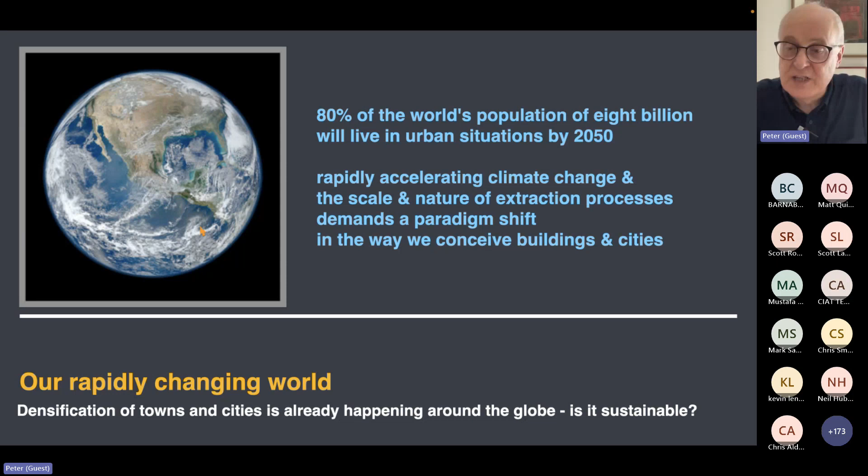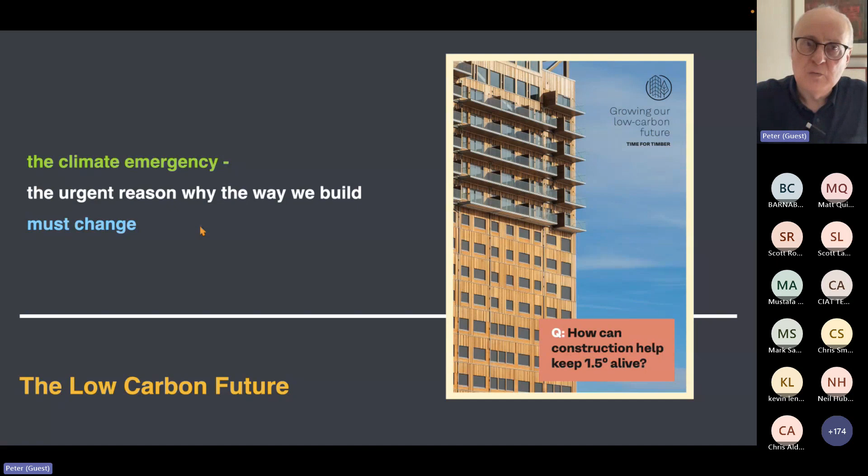So that previous slide was really to say the world is changing. Most of the population is shifting to cities, but climate change, we're seeing all this in the last few weeks, the incredible changes going on. We need to look at how we can respond to that sustainably and sensibly as professionals in the construction sector. And this whole question of the 1.5 degree issue is fundamental to construction, because so much of the world's greenhouse gases are generated by the construction industry internationally, and we really need to think about how we need to change and what that change requires.

So when we say change, I've listed 2 columns there: the energy crisis, climate emergency, Brexit, post-COVID, cost of living crisis. We all know those things. We hear about them. What we do about them is another issue. On the right-hand side, you'll see things that are very particular to the construction industry in this country. We have problems with damp in buildings, condensation, poor or no thermal insulation, poor air tightness. We also have poor construction quality, and that's been exacerbated by the loss of skills, either people retiring from the industry brought on by COVID, or people leaving the industry brought on by Brexit.

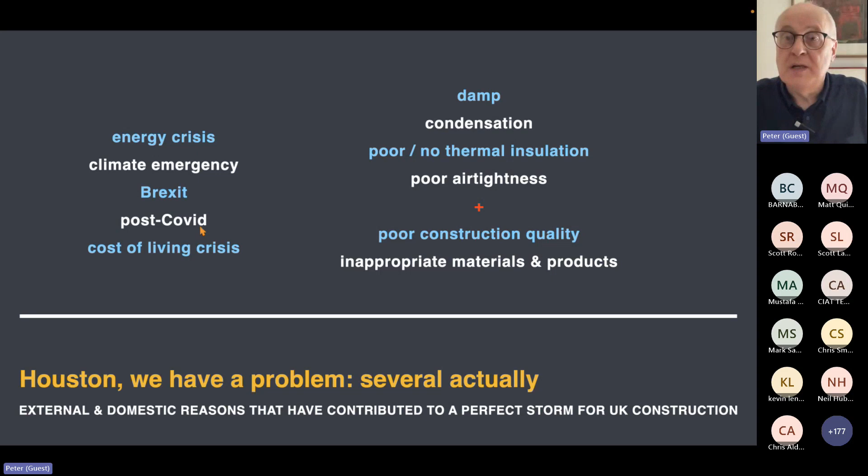But we also have a lot of inappropriate materials and products being used. We import, for example, more than 80% of our construction timber into the UK. This is not sensible in the modern world.

And when we look at Mark Farmer's, something's happening. Oh, my buttons are going too fast here.

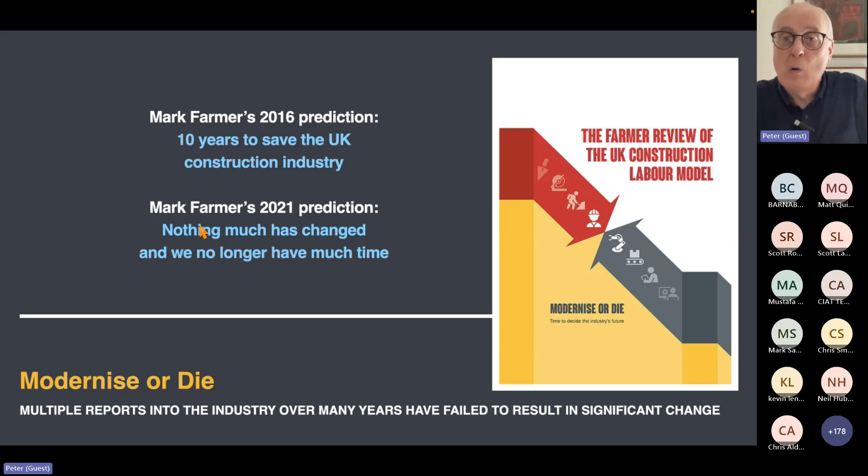Look at Mark Farmer's prediction. He wrote a very, very good report, a seminal report in 2016, saying there were 10 years to save the UK construction industry. 5 years later, he wrote another shorter report saying nothing much has changed. And that's partly because our industry doesn't change unless it's forced to by regulatory means or legislation. And we need to really get serious about this. So I'm not trying to be a harbinger of doom here, really to say there are huge opportunities and possibilities in what I'm going to talk about.

And partly that's to do with what I showed with that global picture. The urban densification process is rapidly increasing movement of populations, not just from country to city, but from country to country, and there's lots of debate about it in this country. The climate emergency, we know about net zero carbon targets. We're nowhere close to meeting the circular economy. There's some energy towards developing that, but it is not yet at the level it needs to be. The use of renewable materials is still at an early stage for a lot of practitioners, and even thinking about the use of homegrown timber resource.

And I'll come on to that, because we have an issue here in this country, which is we don't actually manufacture anything. Most of the things we produce as mass timber systems, CLT, etc., we import. It was possible to manufacture, and I'll come on to that later, but we need to think much more about the resources we have here, and particularly the renewable resources we have here.

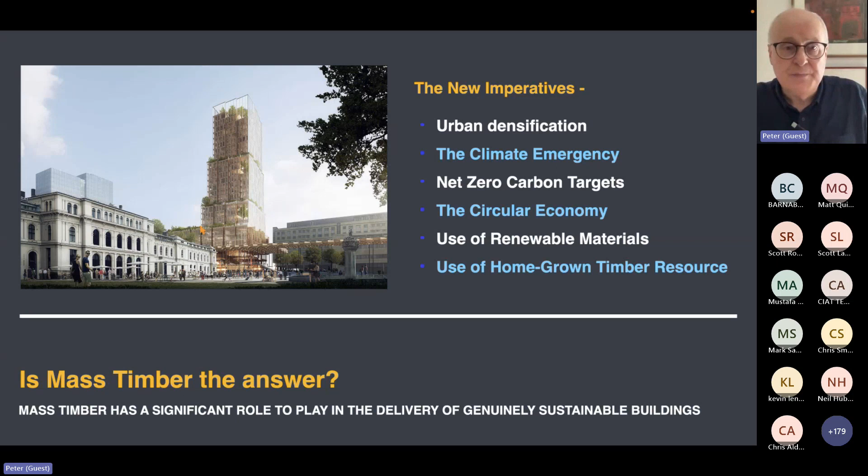So is mass timber the answer? Well, it's up to you, really. We can either all be in the vanguard of change, or we can lag in the slipstream. We can look at all the research, the projects going on elsewhere in the world, and still feel, as many contractors I speak to do, they say, "Ooh, this is a new product. This is something different. This is risky. We need to put a premium on the price here."

So this is the building, I would say, was the first CLT building. So we've actually been using CLT in the UK for nearly a quarter of a century. This, the roof and the walls here of the Shrewsbury Music School; Pringle Richards Sharratt, or PRS as they're now known, did this building. And it was a very early thing. They discovered something about CLT. They went to a company in Germany, Dickholz, and brought CLT panels here and introduced them into this building.

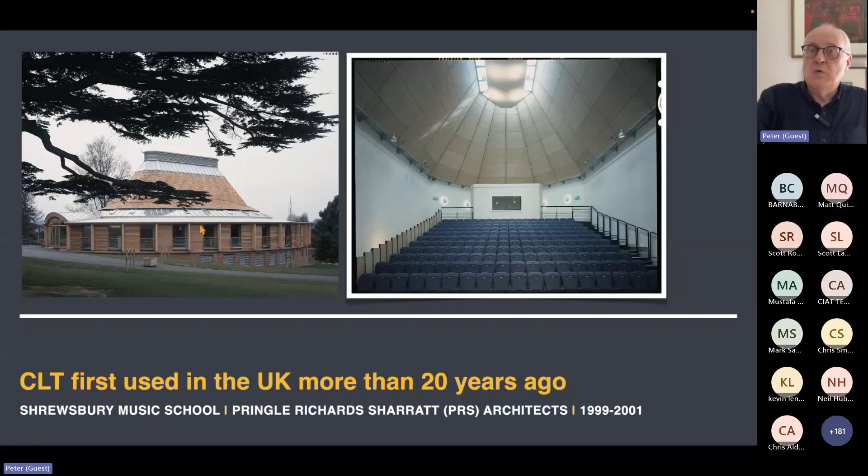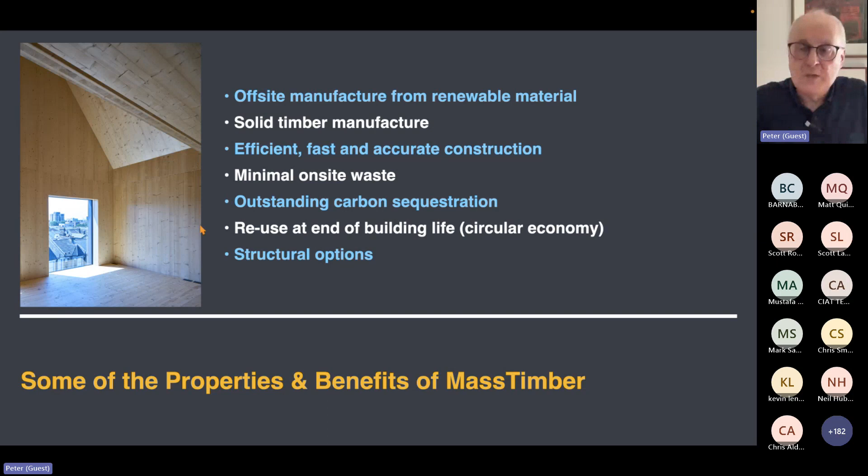So there are many properties and benefits in the use of, and I'm saying mass timber as a collective term here because I'll come on to what the different mass timber systems are. But you can see here there are lots of benefits that come from the use of CLT or glulam and so on. And actually, I probably have a list of about 50. I think there's about 20 here, or maybe less than that, but I'm limited in the number of slides I can show you today in terms of time.

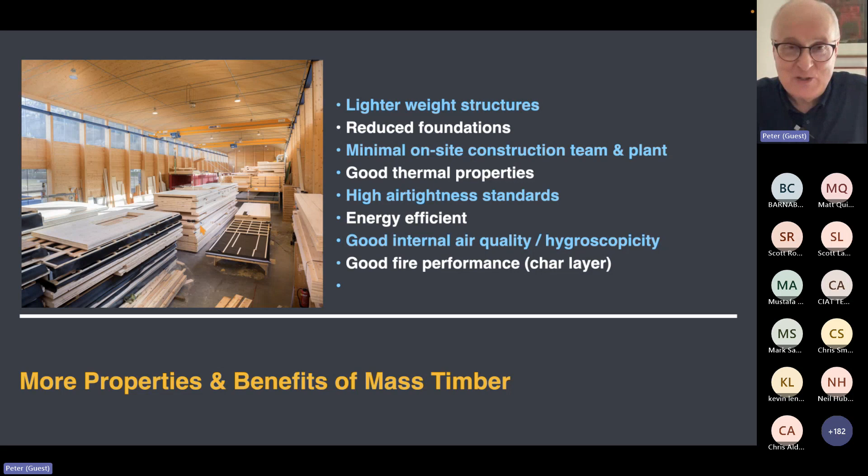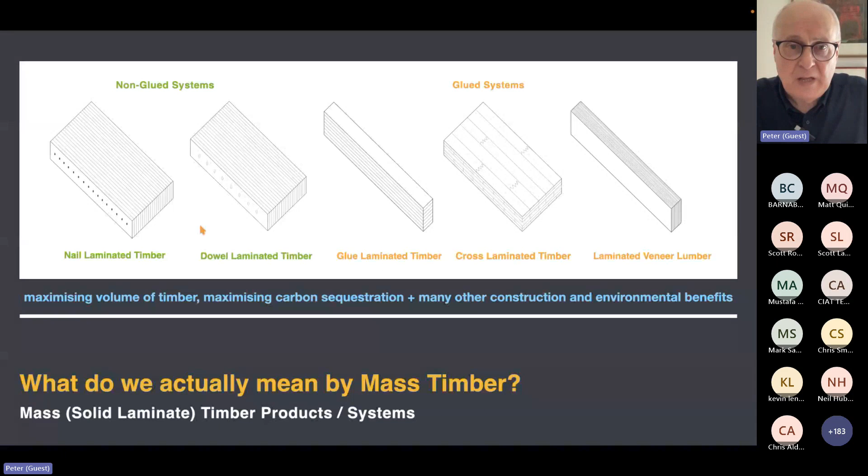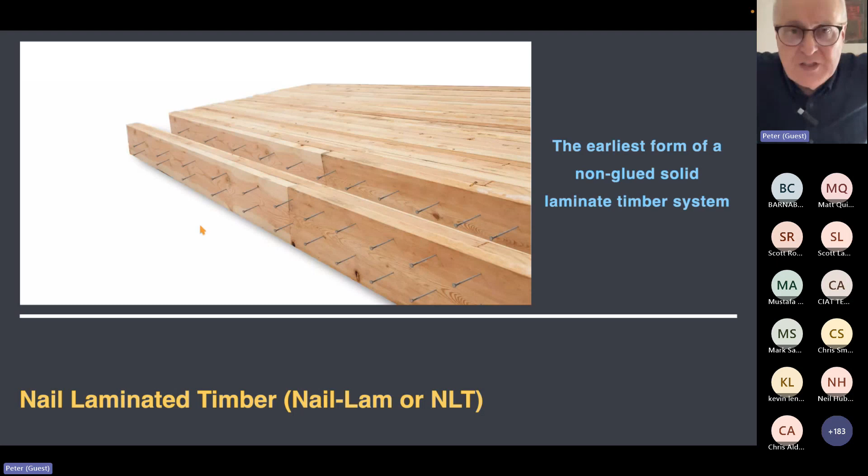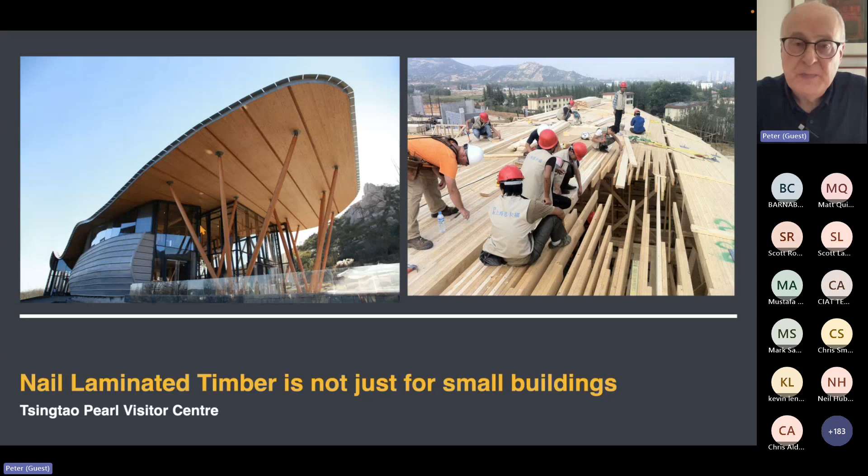Nail laminated timber, you can see from this illustration, it does what it says on the tin. It started in North America in the 19th century, nailing big planks of wood together to create flooring systems in warehouses. We have a whole presentation about just nail lamination, so it's not just a pass-you-by kind of thing. This is an example of one in China, where the main panels are developed by a company in Vancouver, StructureCraft. And you can see on the roof the way the panels are being connected to each other manually, but the main panels are prefabricated. And so it's not just a rectilinear opportunity of simple box sections of nailed panels. We can do all kinds of things, and that's increasingly the case.

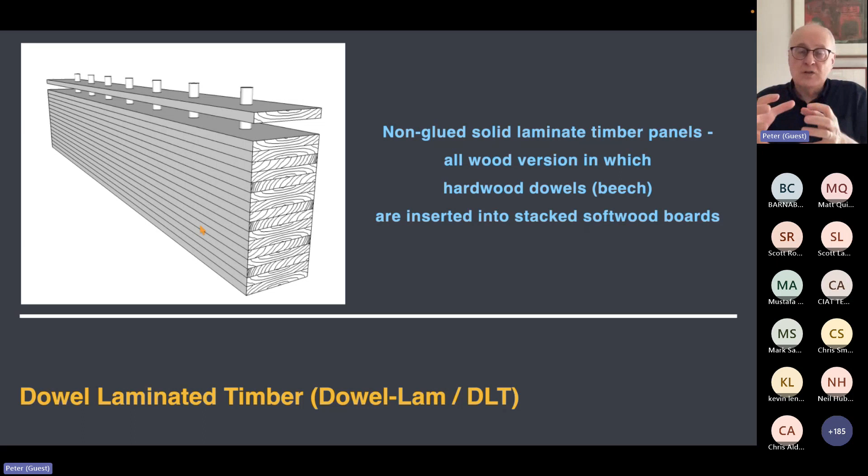Dowel lamination. Yes, it's non-glued solid timber, laminated timber panels. You can see here, just like nail lamination, a pile of boards, this time with holes drilled through, so you're not nailing from board to board to board. You're drilling holes all the way through a stack and then inserting hardwood dowels into softwood boards. And with the difference in moisture content between the hardwood and the softwood, as it reaches equilibrium moisture content, the hardwood dowels expand and lock the whole thing together. And that's basically the technology.

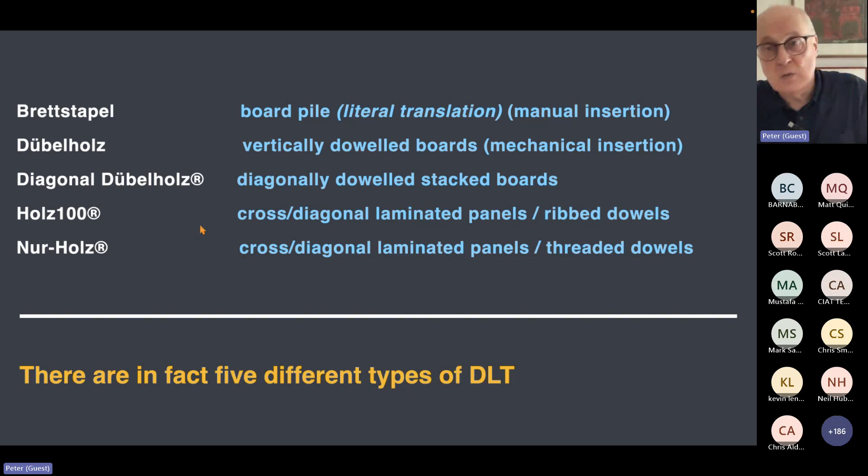But there are actually 5 different types of dowel lamination, and we do, again, a whole course on this about all the different types and the different opportunities and the reasons why this is an interesting technology. And partly it's an interesting technology because this is something we could manufacture locally throughout the UK. We don't need a huge facility with humidity and temperature control for the curing of glues. We can do things more local to the forest and so on. So this is an interesting thing and worth coming back to.

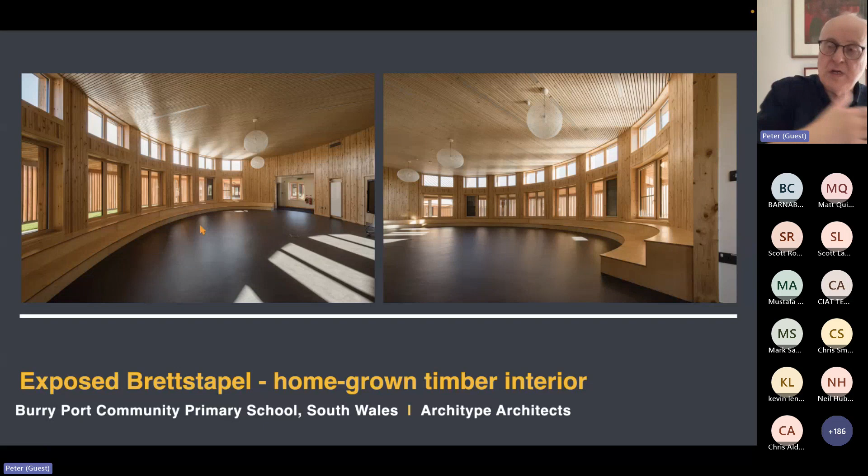And using our locally grown timber, whether the species that are available in the south of England or in Scotland or in Wales, different opportunities are possible.

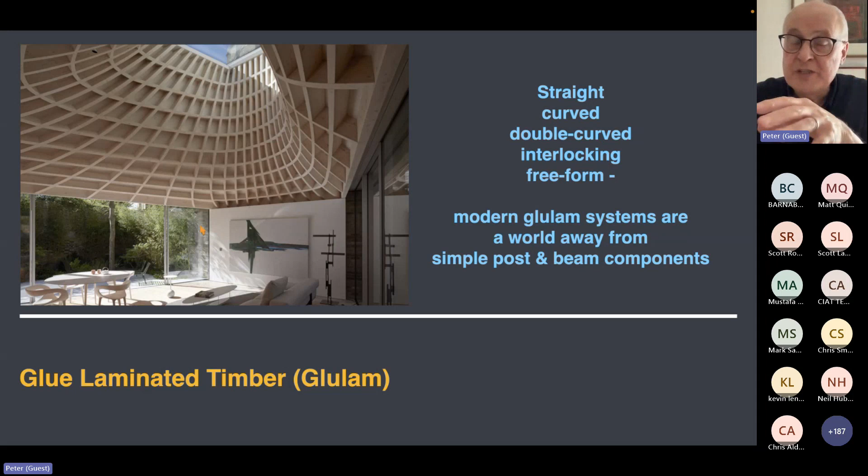It's a very remarkable building because every piece of glulam there is individually tailored to fit. There's no identical pieces there, and every piece was brought through the house to build this in the back. So all things are possible, through the kind of computer technology we have to design things, but also the computer technology we have to manufacture things.

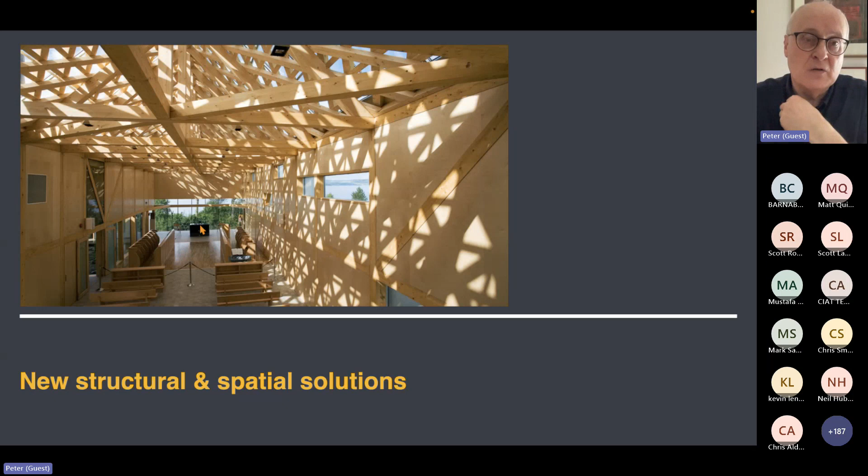And we can get new structural spatial solutions with glulam. This is using very basic beams, but overlapping, crossing, everything else to get a remarkable quality of interior in this convent in Norway.

Then if we move on to cross-laminated timber, I've said here, it's very definitely not a fashion item. It's treated in the magazines kind of like that. Oh, well, we're all using this now. It's all the latest thing. And it's partly the latest thing because it locks up massive amounts of atmospheric carbon dioxide over a long period of building and possibly beyond if we reuse the materials. It's a very sustainable way of building. It's a very quick way.

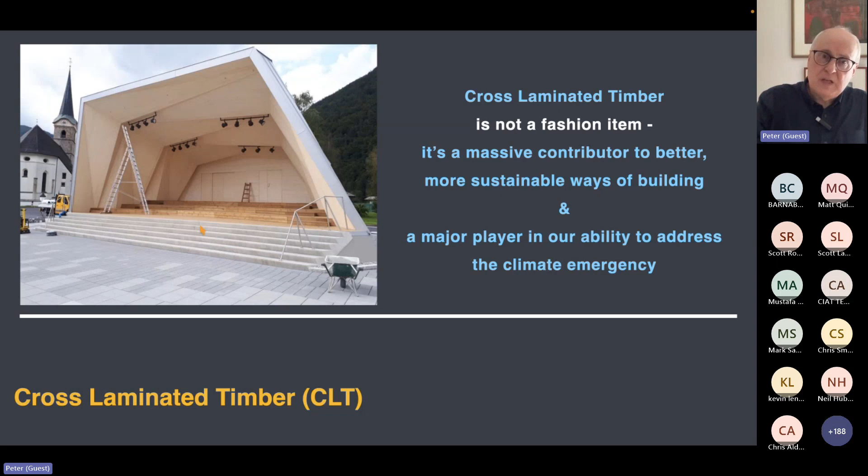In that list I showed earlier, it's lightweight buildings. So less foundations, in this particular example in London, beside a canal, less foundations. And in London, you're over Victorian sewers, underground train lines. We need to think differently about just pouring lots of concrete into the ground. It's not the way forward. It's still necessary in many instances, and I'll talk about hybrid structures possibly if there's time.

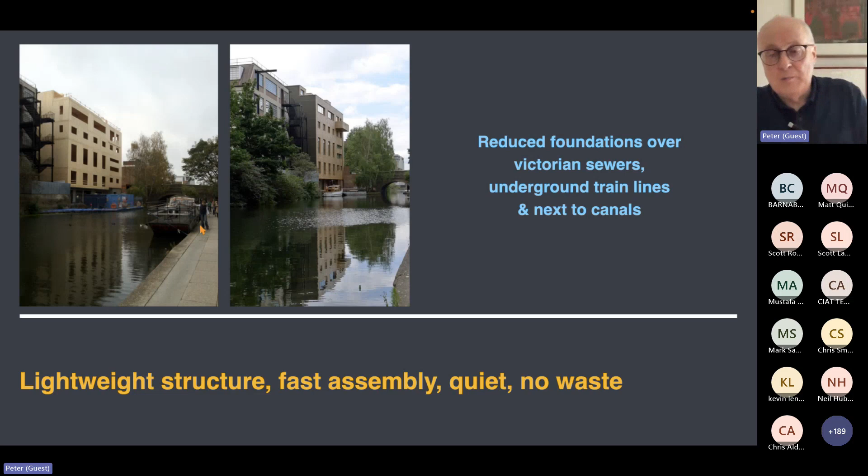The point here is that prefabrication of panels and beams and so on means fast assembly, very precise connections, maybe within 1 and 2 millimeters, and quiet on site. That's a big thing in urban situations, being able to build quietly with few tools and no waste, because all the waste is produced in the factory and it's reused there for firing kilns and so on to dry timber.

So hardwood CLT is something we have made in the UK, and this project here in the courtyard of the V&A in London was designed by Waugh Thistleton Architects and ARUP. It's hardwood. It's a tulip wood from East Coast USA. It grows like a weed there, but it's generally used there just for furniture or plywood manufacturing. But it's a beautiful material, and its great benefit is it's incredibly strong and stiff and lightweight.

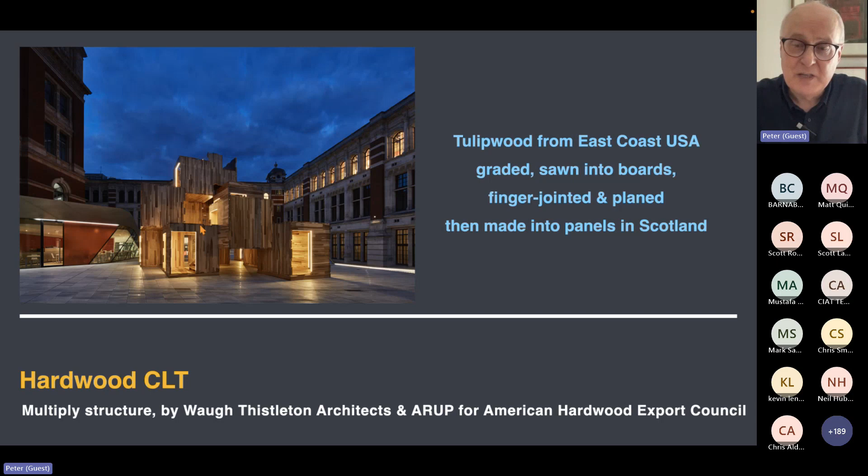Well, the panels themselves were made in Glasgow, but the boxes were made in York and then shipped down to London to be assembled here without foundations, because that courtyard floor is over a gallery. And it was a kind of three-dimensional maze, but it was about showing we could make modular buildings, but also showing we could actually make CLT in the UK, albeit this is imported timber.

Then on the fifth of the systems I'm talking about here, laminated veneer lumber. This building is in Seville in the south of Spain. It covers several city blocks. It's an enormous building of interlocking laminated veneer lumber. And if you don't know what laminated veneer lumber is, I should have explained this when I showed that diagram of 5 systems, because LVL is what it says.

It's a veneer. So what happens is that logs, instead of being cut up in a sawmill into boards, the logs themselves are rolled against the blade. So there's a continuous rolling, creating a continuous sheet. So the log is reduced down to about the size of a broomstick diameter. And that continuous sheet is cut into different sizes. They're overlaid, glued to build up very large panels, or just simply standard size boards, similar to the size of a plywood board.

But when you get into much bigger LVLs where you can cut and shape and twist and so on, you begin to see the possibilities for different kinds of building forms, perhaps building forms that relate more to building types, new building types, and the large, ever larger building types that we're seeing, and needing to find ways of building them that are not being built with concrete or steel for large spans.

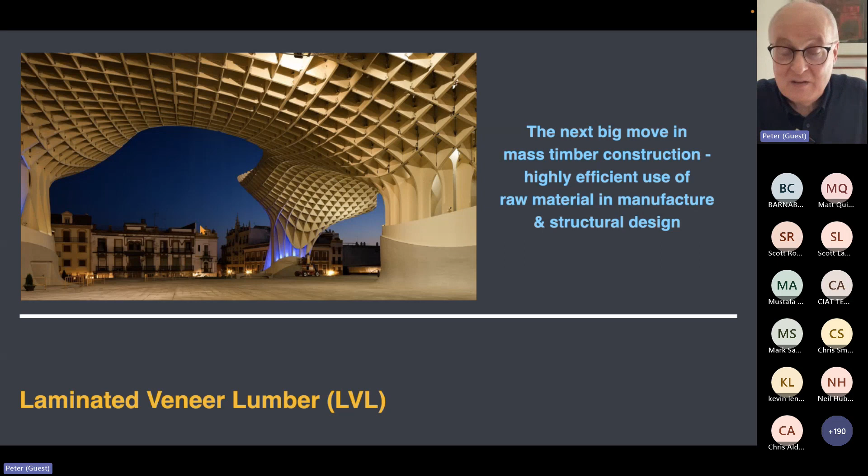In other parts of the world, a lot of research is going into bamboo and producing some extraordinary buildings and materials or products from that. I'm not going to talk about bamboo here because, well, basically it's grass, not wood. And I've nothing against bamboo. I think some of the things that are going on in the world at the moment are just remarkable.

But here we see, I showed you there was softwood LVL, and most of these products are all made from softwood. Whether it's dowel lamination, nail lamination, glulam, CLT, LVL, they're generally made from softwoods because they grow straight, they grow fast. They're made generally from disease-free trees.

But in the last few years, we've seen the emergence of hardwood LVL, and this is an extraordinary product because it's very strong, it's very stiff. It means that for the same structural strength and stiffness, you can have a smaller section than you would do with a softwood LVL beam or post or whatever.

And this project is remarkable insofar as this is built in the City of London, where really since the Great Fire of 1666, the London Building Acts kind of outlawed timber in construction, and we see most things ever since made in other ways. The world is changing, as I've said at the beginning of this presentation, and what you see here is a building that went up very fast, very precisely, incredibly quietly, and is completely of wood.

Not just the structural frame, which is LVL; there are CLT panels that floor the whole building. The core for the stair and lifts is timber, and the cladding as well is thermally modified tulipwood. So this is an interesting building, not just because of the technology, but because it's a commercial building in London made from timber and in a very dense area of London.

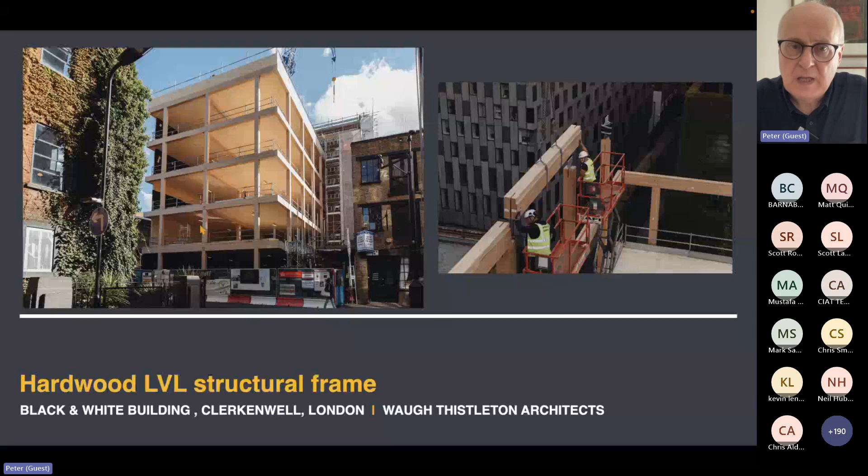And of course, all these products conform to various UK and European standards for adhesives, structural design, EPDs and so on, CE marking. And we're still using all these things because, strangely enough, in the government's recent decision not to change to some UK version of European product declarations and so on, construction products weren't included in this. So inevitably, because we're importing so many things, the standards we're looking for all the time are to do with what's available in terms of European standards.

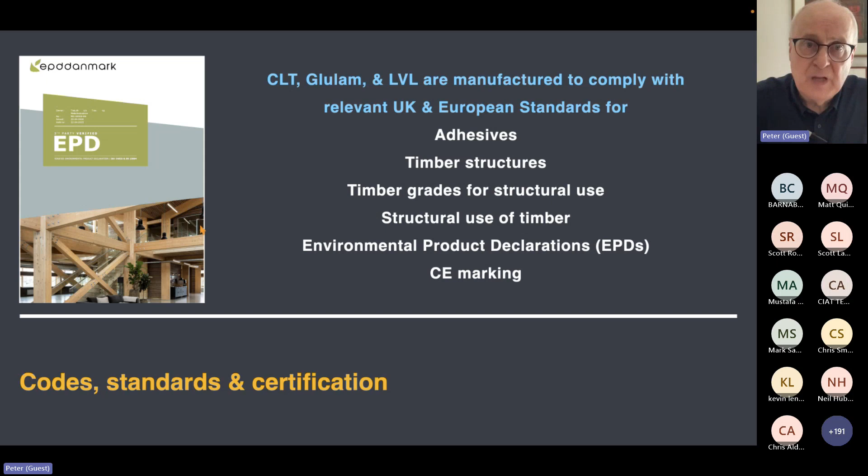And then, okay, the elephant in the room. We know that after the Grenfell fire, a certain amount of reactive legislation was brought in in England and Wales. It was to say anything over 18 metres, the entire thickness of the wall had to be non-combustible, which, if you've worked on timber structures, platform timber frame or anything, you'll know this is quite difficult in terms of all the layers that we put into walls nowadays for all kinds of things. But the structural thickness of the wall is a problem.

In Scotland, it was less of a problem because we've been used to building with timber frame for many years, and so the legislation introduced here only applied to the cladding, which was the issue, of course, with Grenfell, because there was no timber in the whole of Grenfell in terms of its structure or external cladding. The cladding was a problem, but we know these things. But the legislation proved very restrictive to the opportunity of what was then the fast-growing market, particularly in London, to build up to 10 storeys of residential accommodation.

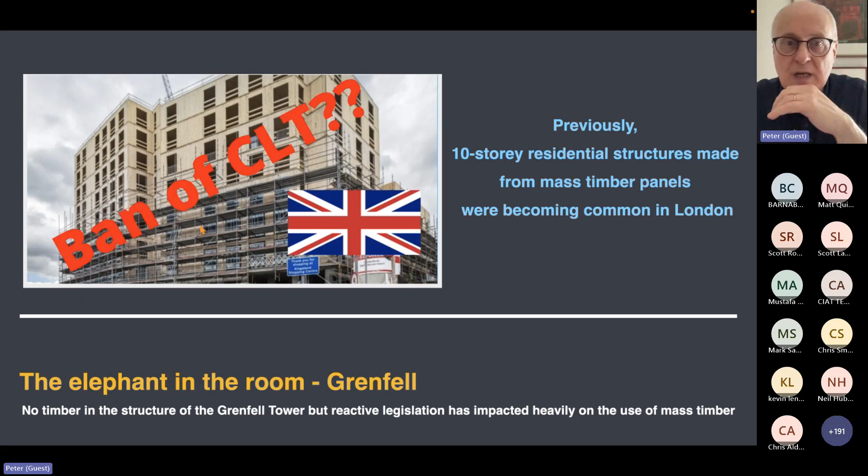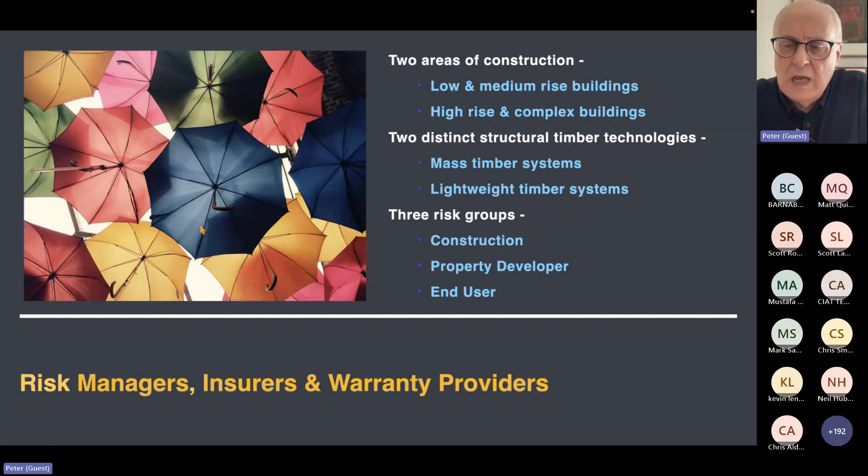Now, that's an important distinction because obviously for insurers, risk managers, warranty providers, there's actually a number of different issues. They look at the difference between low and medium rise buildings, between high rise and complex buildings. They look at distinct structural systems, whether it's lightweight timber or mass timber. They look at risk groups. Is it in the construction, or is there risk for the developer? Is there risk for the end user? So there's a lot of different insurance issues, which now there's a lot of work going on to sort out.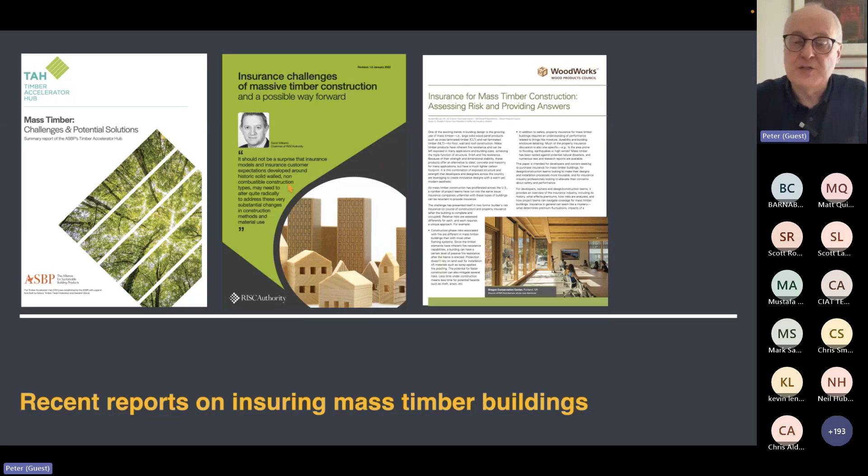These are some of the recent reports in the UK just examining this. I saw just yesterday that Aviva have said, look, they're much more open now. They've looked at all of this. They're much more open to mass timber buildings, well, commercial buildings, I should say. And that's an important distinction because, strangely enough, with the legislation that was introduced in England and Wales for the building regulations, the legislation applies to residential structures over 18 metres. So there's been talk about reducing that to 11 metres, but legislation doesn't apply to commercial buildings.

So buildings are still being designed in London in mass timber construction, in timber. They're not restricted in terms of height or wall thickness or anything else. And that's an interesting distinction. I think just in the rush to produce legislation after the Grenfell tragedy, it was focused all on residential structures, and quite rightly. But there's still other possibilities.

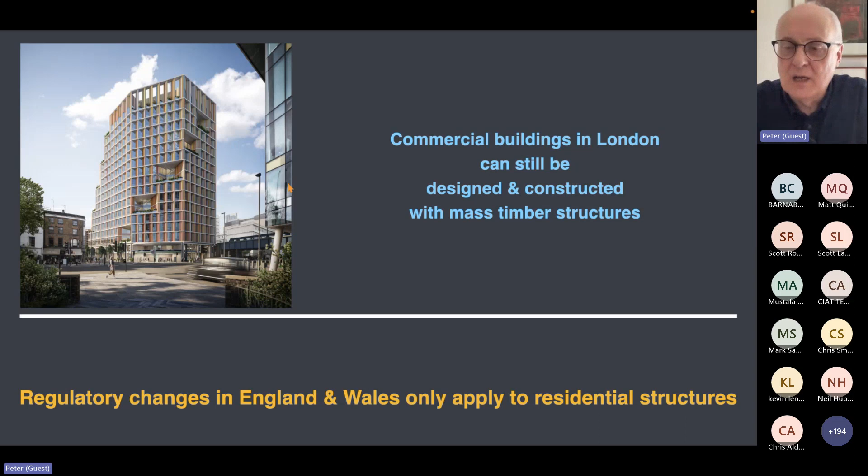And I think a lot of the research that's gone on recently into fire issues is a major issue for insurers. But the other major issue for insurers is moisture, moisture penetration, and that's a whole other world in itself. And we have courses on that and on the fire side of things to talk about what you need to know to control moisture ingress into mass timber, because it doesn't perform the same way as a concrete slab or a masonry building. It's quite different, and timber will always perform differently.

So I'll move on more positively, because those other things are things that we talk about in our courses, and try to give you all the information you require to be able to think about design, think about specification, think about what kind of contractors you want to work with, and other consultants who can all buy in to the idea of building with mass timber.

So we ran a conference some years ago about the vertical timber city, talking about the increase around the world since the Stadthaus in Murray Grove in Hackney was built as 9 stories. It was then the tallest timber building around, and that produced an extraordinary amount of interest from engineers, particularly around the world, who began to look at timber in a completely different way, or at least some engineers, because engineers are not trained in timber construction. It's the ones who really saw opportunity in this who have been driving the agenda,

to the point where this building in Skellefteå in the north of Sweden is a 20-story timber hotel. There's a town hall, there's a library, there's a theatre. This forms the whole core of the town here. All of the timber for this building came from within 50 kilometres and was manufactured in that same geographical area. So these things are possible.

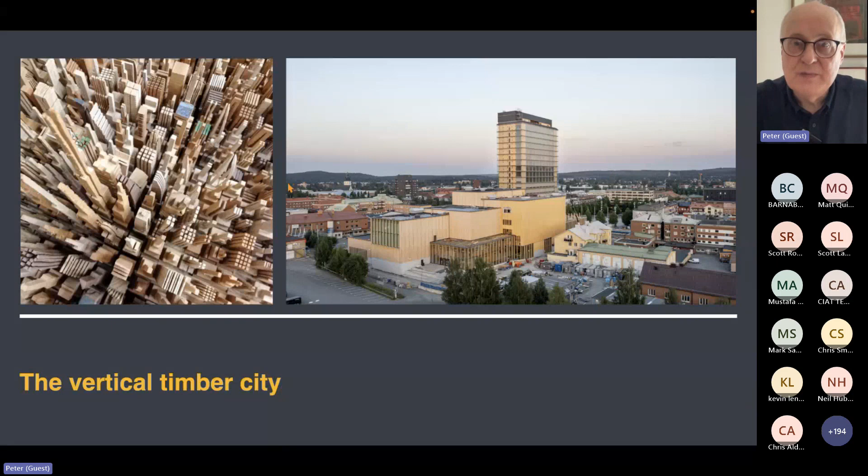When we talk about tall timber buildings, we also talk about autarkic city districts, and that might be a word you're unfamiliar with, but basically means how these buildings produce not only enough energy within themselves for the building to function, but how to create a surplus of energy to export into the grid or into other parts of the community buildings around. So there's a lot of really interesting research, development, and practice going on around the world, in America, in Australia, in New Zealand, in France.

The regulations are changed to say every public building has to be at least 50% bio-based materials, which means predominantly wood. The Paris Olympics next year, all the temporary buildings have to be timber so they can be reused and repurposed elsewhere. Netherlands, I think there's something like 20 local authorities around Amsterdam have said timber has to be prioritized in construction. And that's true around the world. Even in New York, there's now legislation allowing for 6-story buildings in mass timber. And that's a city which has been very, very resistant to any kind of timber construction.

So things are changing. And as I say, I've seen designs and talked with architects and engineers about buildings that are planning up to 35 stories. At the moment, probably 20 stories seems to be the main level of operation, and that's completely timber.

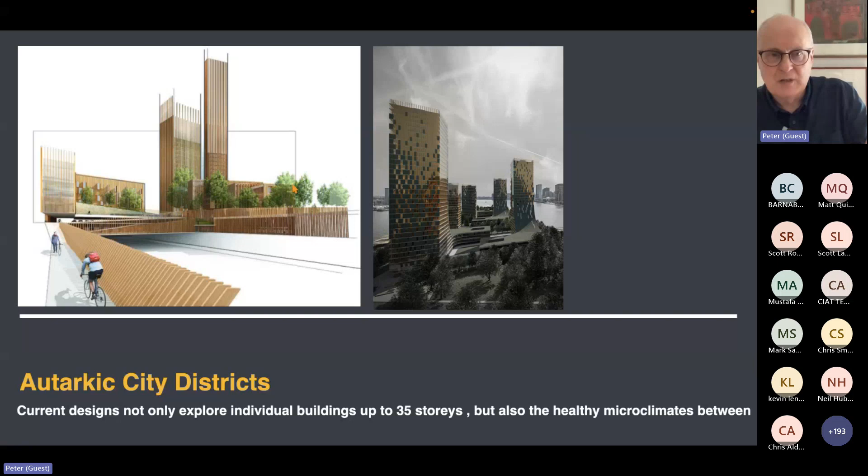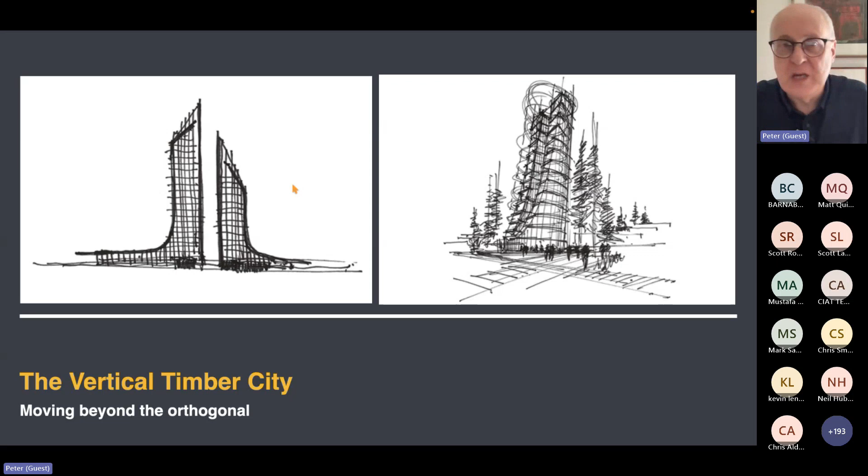When we talk about the buildings or the designs I showed you, they're very much orthogonal, rectangular kind of plans and so on, but lots of ideas, lots of thinking going on about moving beyond that, looking at different kinds of shapes and forms, because the technology of manufacture of timber products now allows for incredible kind of opportunities for shaping and forming the products themselves. As I showed you earlier with this particular project in Seville.

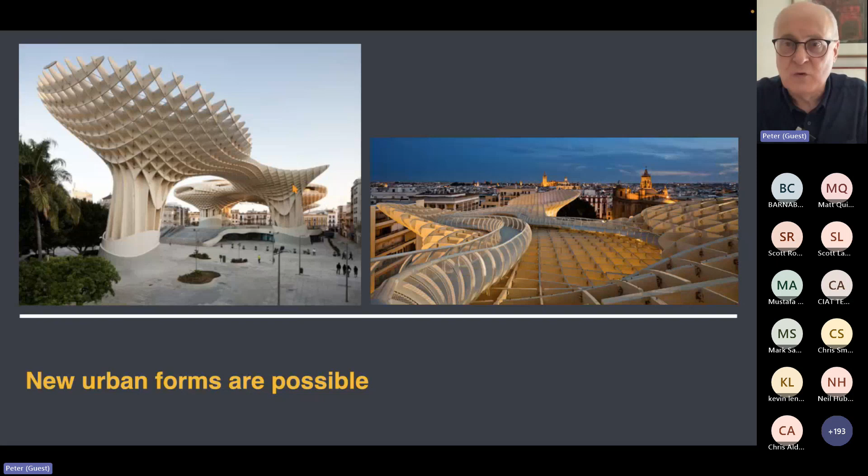And you can see in the distance on the right-hand side, the cathedral. The cathedral is the largest Gothic cathedral in Spain. This building covers several more blocks than the Gothic cathedral. It's meant to cover a market. It was originally called the Parasol because it covers the marketplace and shields it from the hot sun in Andalusia. I think locally it's referred to as las setas, the mushrooms, but you can walk across the rooftops and so on. It's a new type of building form that didn't really exist that way before. And that's what I mean about what the technology offers now.

In America, some years ago, when President Obama was in post, there was a competition introduced to say we want to stimulate mass timber buildings, particularly tall timber buildings, and stimulate the forestry sector and manufacturing sector. And so they ran a competition. $1 million was the prize for a tall timber building. In the end, the judges said, we can't choose between two different projects. Obama said, give them both $1 million. So one was predicated for Portland, Oregon and one for New York.

Neither of those buildings have been built yet, but what they have done is stimulate a rash of tall timber buildings all across America, with state after state changing their legislation to stimulate more use of timber, particularly mass timber. And you can see this bill that was introduced in the Senate at the time when Obama was in post. When it became President Trump, it kind of disappeared, but actually it's passed through now as a Timber Innovation Act, because it was, well, I won't say hidden within an agricultural bill, but certainly it wasn't put up front in the same way. And so it was signed off by President Trump, because obviously he didn't read it.

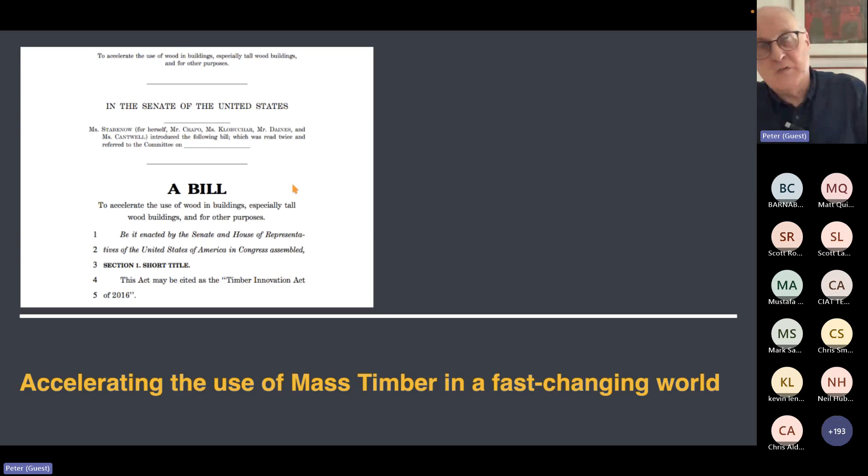And so they have a bill for a Timber Innovation Act, which provides funds for education, for research, for prototype buildings, for demonstration projects, and for stimulus incentives for tall timber buildings. So it's about having the capacity as a profession, as an industry, to lobby for legislation that encourages certain things to happen that are responsive to the climate emergency we're living in.

Can we use UK grown timber? Yes, we can. I'm going to be very quick here. I was involved for a long time at Edinburgh University in research and development on this. We used 6 different species. We made lots of panels. We took them to Timber Expo. Everybody said, this is fantastic. Can we get UK grown timber panels? And at that time, I thought, yes. And this goes back to about 2012.

But our problem was that in Europe, you have the forest, the sawmill, and the sawmill investing in the manufacturing plant. So they're cheek by jowl. Here, the large sawmills are not used to long-term, large-scale investment, and so there's, I won't say resistance, but it's just not happened so far, and the obvious investors really haven't picked up the baton, as it were. But there's a lot of research still going on with my former colleagues at Edinburgh University at the Built Environment and Smarter Transformation Centre.

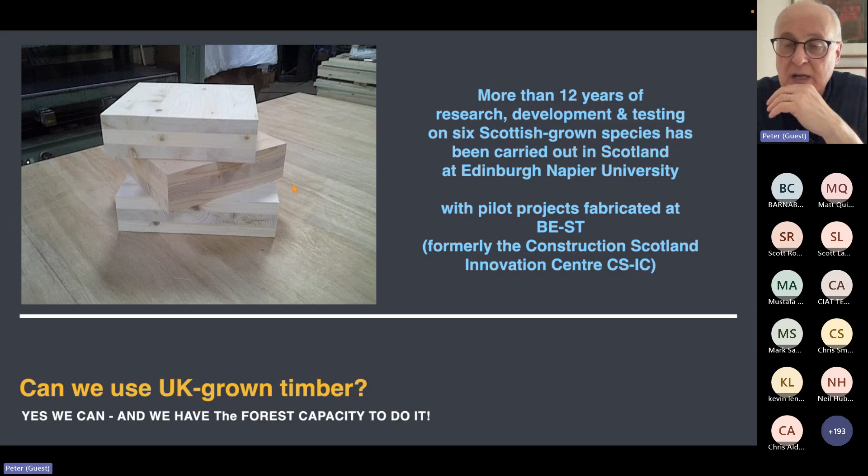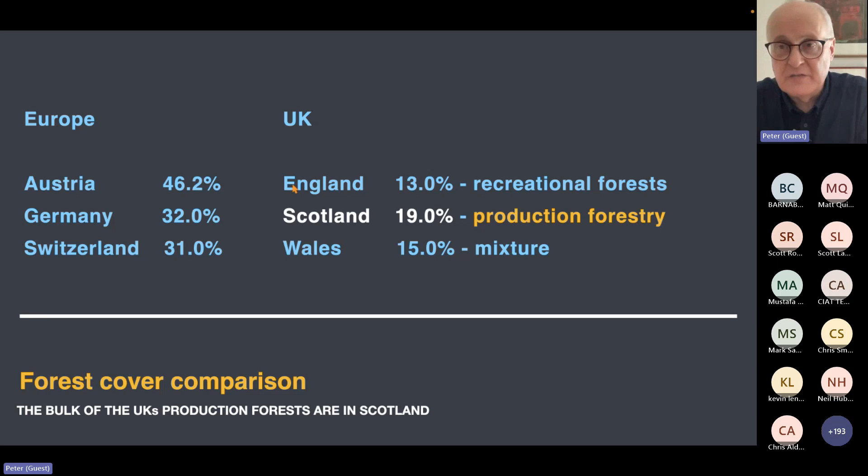And we've been making things because we have a lot of forestry. It's nothing like Europe. When you see the statistics of the amount of land cover of forestry in different countries in Central Europe, even in Spain, it's 35%. Here, England is mostly recreational forestry, hardwoods, deciduous trees. In Scotland, most of it's production forestry. Wales is a bit of a mixture, but we know we've got enough production forestry in my part of the world here to actually run a large-scale manufacturing facility for many years to be commercially viable. And we've done enormous amounts of testing on everything you can think about to do with CLT, glulam, dowel lamination.

We haven't done it on LVL because we have no machines to make the veneers here, but I recently discovered that we could use our Sitka spruce to actually do that, because there's been a lot of talk about producing prefabricated panels for the shafts for wind turbines, onshore wind turbines. That's another talk in itself.

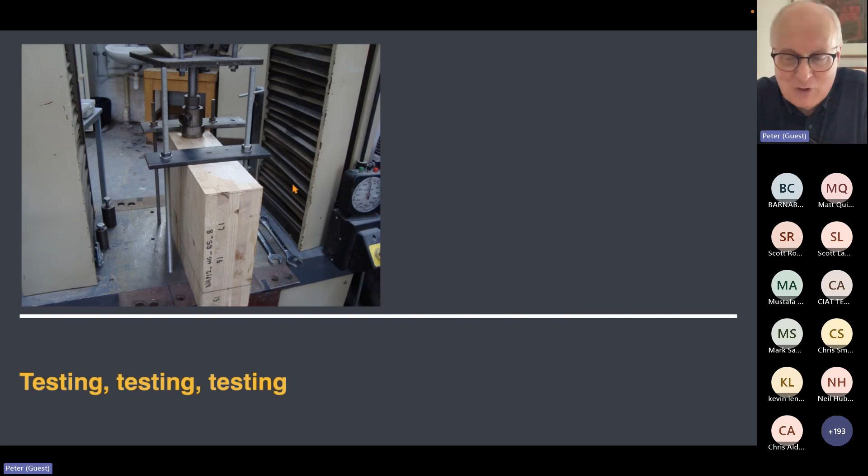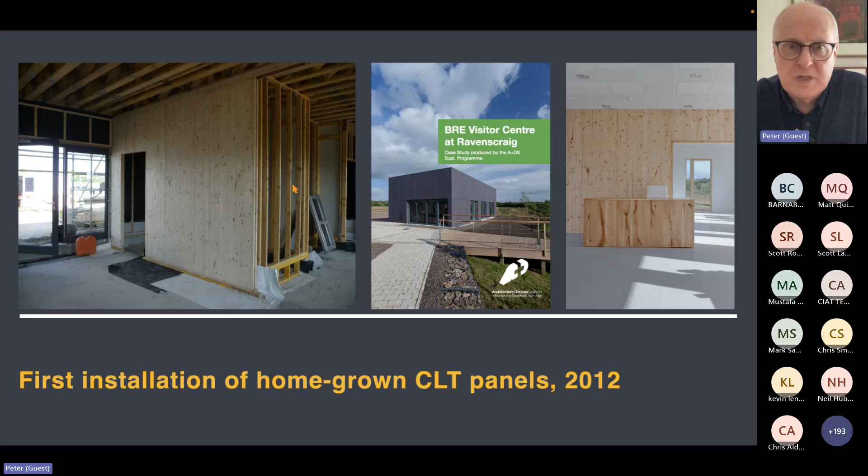But the first installation we did of homegrown CLT panels is, as I said, about 11 or 12 years ago, in this little visitor centre. We made shear walls for it, and that was really to get the show on the road. Then we sent a lot of timber to Derix, a company in Germany, to manufacture large-scale panels, and these were installed as party walls and shear walls in Athletes' Housing in the Commonwealth Games in Glasgow in 2014.

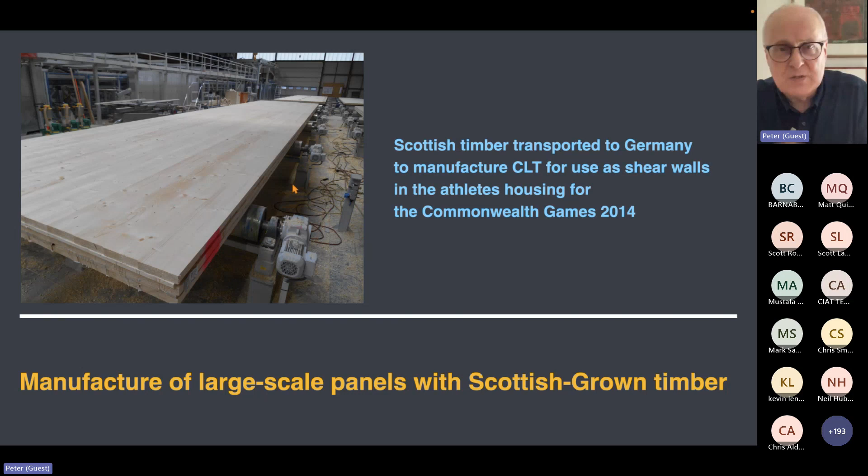So there was a lot of activity, and then it's kind of, I won't say stalled, because we've been now making at the BE-ST facility near Glasgow CLT panels, glulam panels, nail laminated panels.

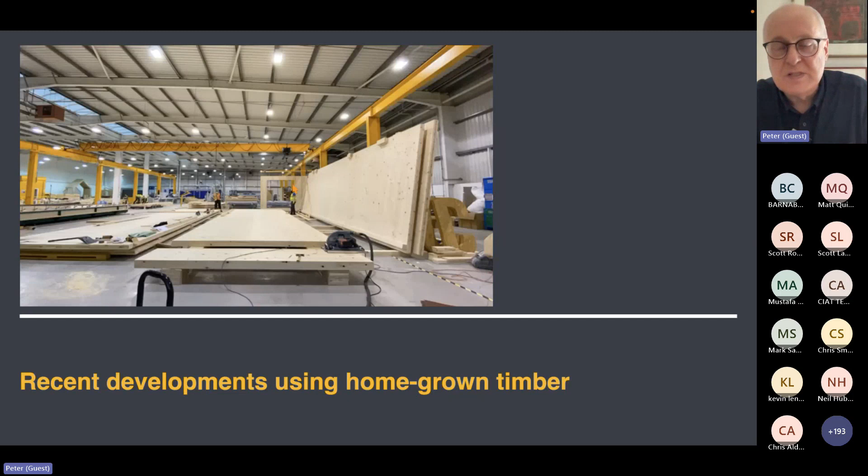Oops, that's a bit of video. I don't have time for that just now.

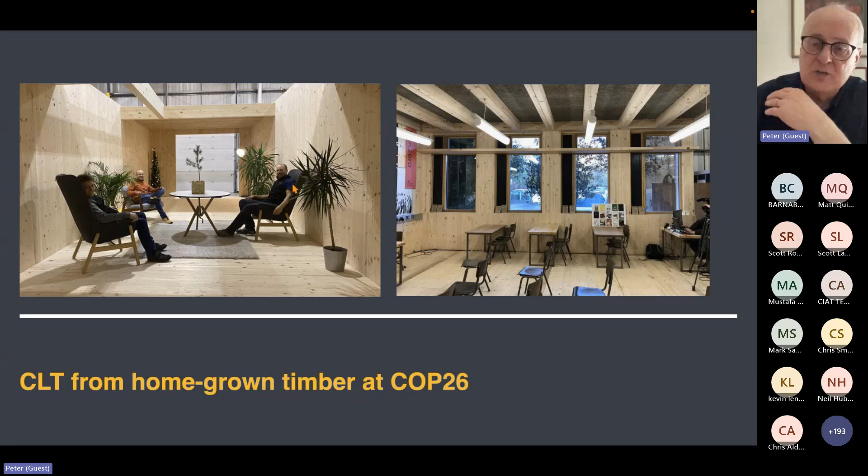And we made systems for display at COP26 in November. It took a couple of years ago, and so there was housing modules, but also prototypical classrooms, which are now being taken up by the Department of Education in England, looking at how do we get these into kind of more general manufacture. And then here, still relatively small scale, but producing modular systems.

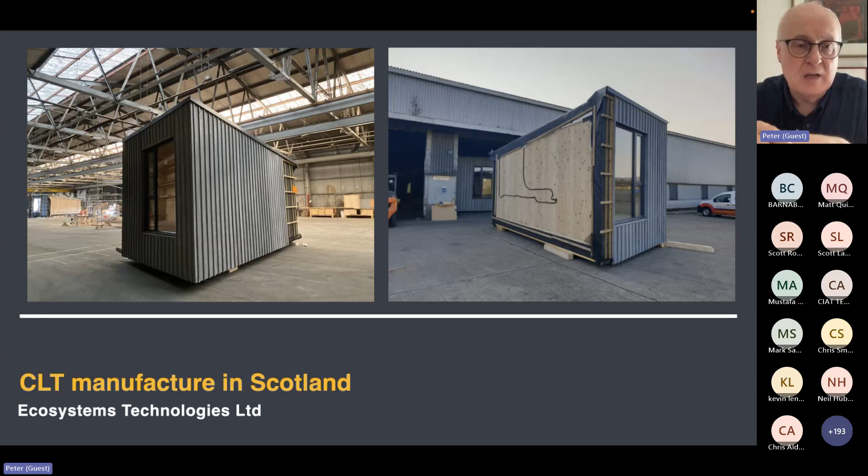A company called Ecosystems Technologies producing these, and these were teaching modules for a school in Edinburgh. You can see that rather kind of French chateau-style school. But these are fair-faced inside, glulam floor, so the glulam runs crosswise, so it makes up a panel that's pretty much like I showed the way nail lamination would work, but as a glued system, and a series of panels put together. And then the ceiling here is kind of stepped sections of wood, so you get a kind of acoustic benefit. But more importantly, we've used wooden nails here.

We've used basically beech dowels that have been densified and impregnated with phenolic resin, so that when you fire them in pneumatically, it stimulates the lignin in the softwood. And basically, that has a kind of gluing effect. I have a whole series of test panels of this, because we're now testing cross-laminated panels made with wooden nails. And we're going to put them into a building on the west coast of Scotland shortly, inside an old ruin, so to create a new building inside the ruined walls, to repurpose the facility for a new purpose.

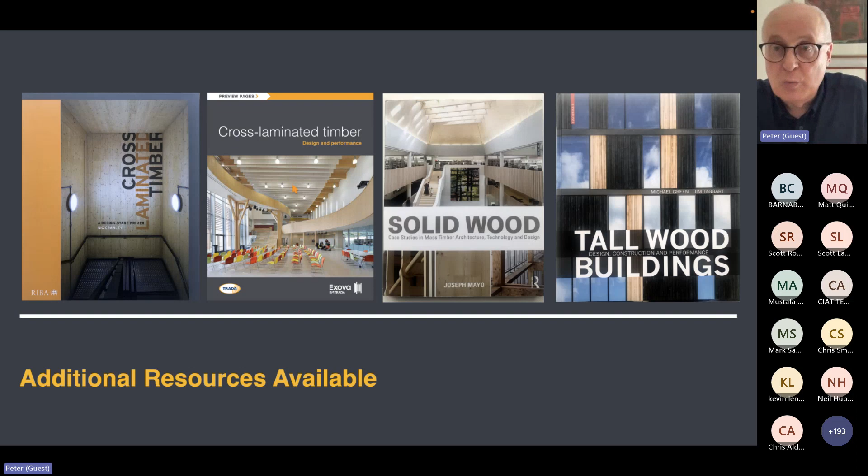There are other books you can buy and find out where some of the things are. We've had talks by, for example, the RIBA publication there, which is tied to the RIBA plan of work, to take you through the whole process of how to get CLT into the building. Nic Crawley, the author of that, works with DRM, not DRM, I'll come back to that. It's a fantastic book. The other books here, Trada's book, Solid Wood, covers a range of things, plus some other mass timber systems they use in North America, like jumbo plywood, and so on. Tall wood buildings, there's a lot more information coming out on that.

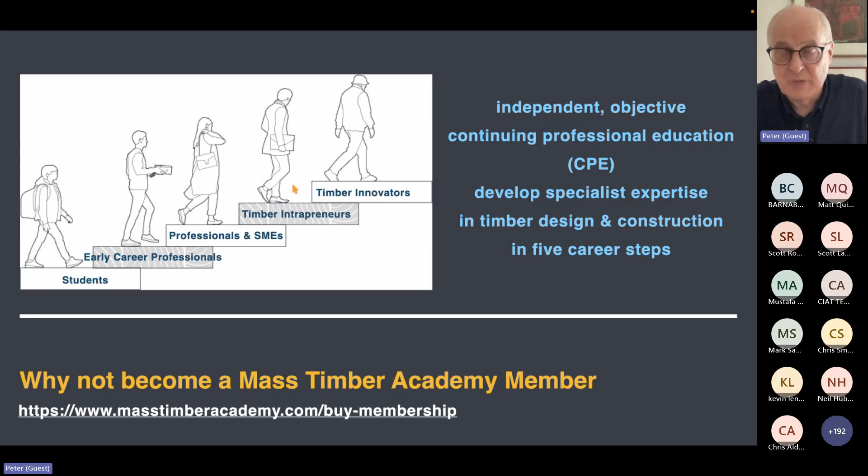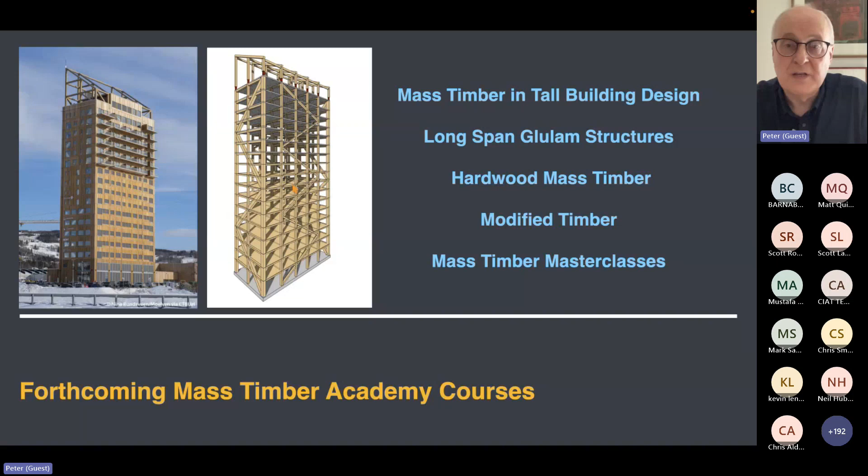Mass timber, because that's a lot of the questions we get. Long span structures, hardwoods, mass timber, modified timber, and a whole series of masterclasses that are really to do with talking with architects or engineers who have done maybe 10 or 12 really interesting timber projects over the years, to look at the way their own philosophy and understanding as a practice of timber has developed, because they're not all designing identical buildings. So we want to know more about not just the technology, but how they've interpreted the technology, how they've applied it, and what the lessons learned have been. So these are masterclasses and case studies, and we'll be running a whole series of these from the autumn onwards, from really fantastic practices and consultancies. So a lot to think about.